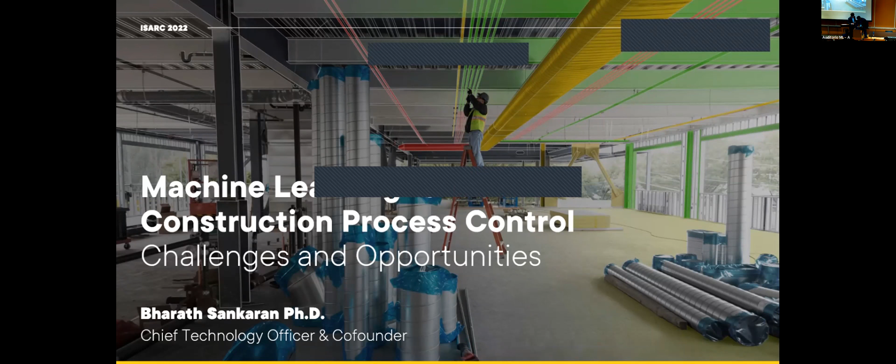All right, perfect. Hey, I'm Bharath, and I'll be talking to you about process control in construction and how you can use ML to address some of these issues. So I'll give you a brief overview of the problem: how do you implement process control, where machine learning and AI can have an effect, and what are the practical implications and the challenges that you face when you try to take this on site?

So construction is one of the world's largest industries, but also one of the world's most wasteful and inefficient. In fact, not only does it have a huge economic impact, it also has a humongous carbon footprint. But if you think of it, at the end of the day, construction is just on-site manufacturing. So how does it rank up with other forms of manufacturing?

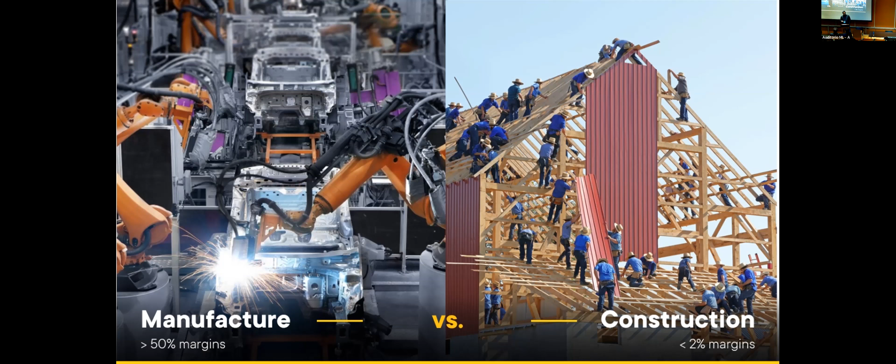Other manufacturing sectors, practically anything that is not construction, have incredibly high economic margins and are close to approaching zero waste. But construction is on the other end of the spectrum. And why is this? It's because they've implemented very efficient process control, and construction lacks process control. So the question is, how do you implement process control in construction?

For the control theorists out there, this is a control diagram, but basically process control is you have a reference state, you measure what's going on in the process, compare it to your reference state, and see how the two things have diverged. In construction, you have a wonderful reference state, which is your BIM. It's a 3D model that's evolving in time, so it's 4D.

You can compare this to the process on site by capturing the process on site through reality capture. Basically, the BIM is giving you geometry that's evolving. You capture geometry on site, you compare the two things, and you can figure out how they're diverging. And if the geometry is wrong, it's fairly safe to assume that the process is not going well.

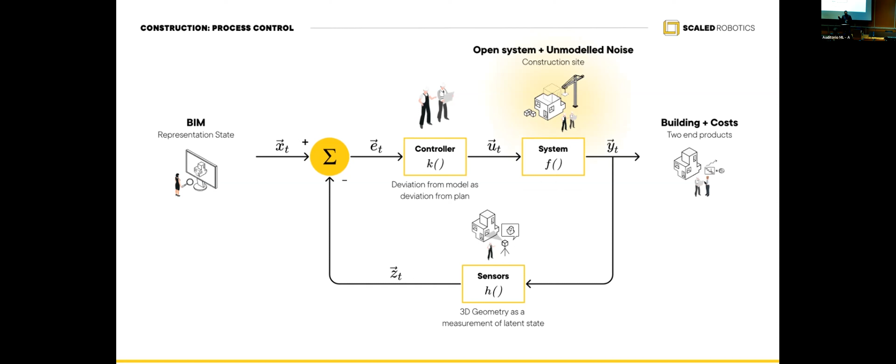But there is one practical issue in construction, if you think about it from a control standpoint: the system is open and there's a lot of unmodeled noise that enters the system. So what implications does this have? Why is it challenging? First things first, I said the BIM was your reference signal, but the BIM is a living document on an actual construction project. It's not designed once and left as is. It evolves during the course of the project, which makes it very hard. So you have an evolving reference signal.

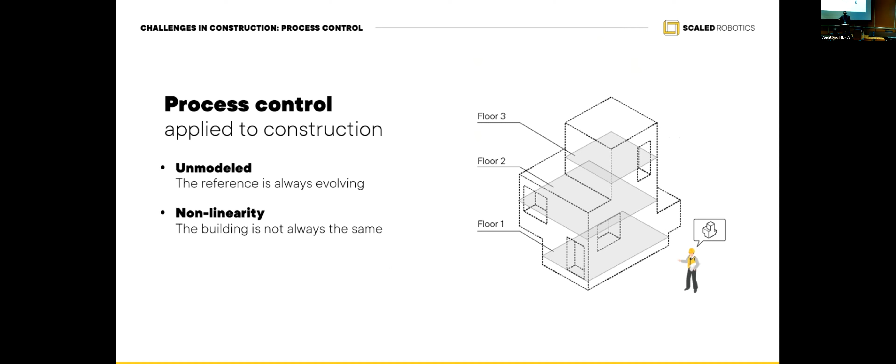Second thing is the process is extremely nonlinear. The only thing linear is gravitational causality. You can't build floor 3 before floor 2, but everything else in the process just runs whichever way it can. Then it has an extremely dynamic environment, which causes a lot of occlusions. So there's workers, materials, scaffolding, you name it. This causes what you call partial observability. You can't see the site entirely. You can't measure it entirely.

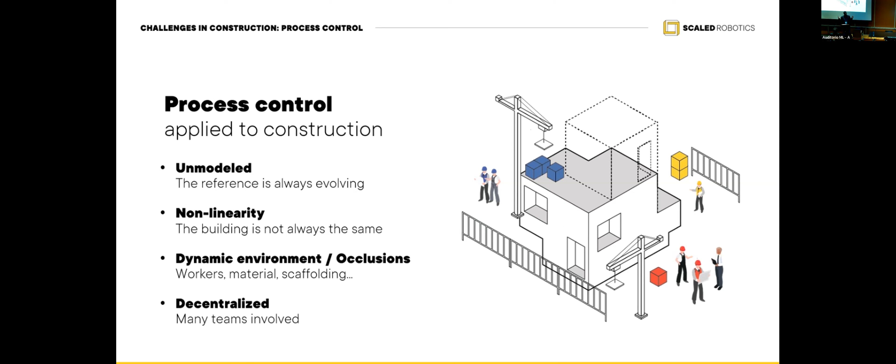And finally, it's a decentralized control problem. So we spoke about a BIM, but actually there are multiple BIMs. Every team has its own reference model and they just go ahead and do whatever they want to do. Outside of the practical implementation issues, you have environmental issues because a construction site is neither indoor nor outdoor. So you get the worst of both worlds.

It has both static and dynamic elements, and the dynamic elements have different frequencies of motion. So people walking on site move at a higher frequency versus scaffolding and temporary works, which have a lower frequency. And you have a lot of unmodeled things because a construction site at the end of the day is the storage facility too. So all of the material that comes into a construction site gets stored over there. So you have a lot of unmodeled noise.

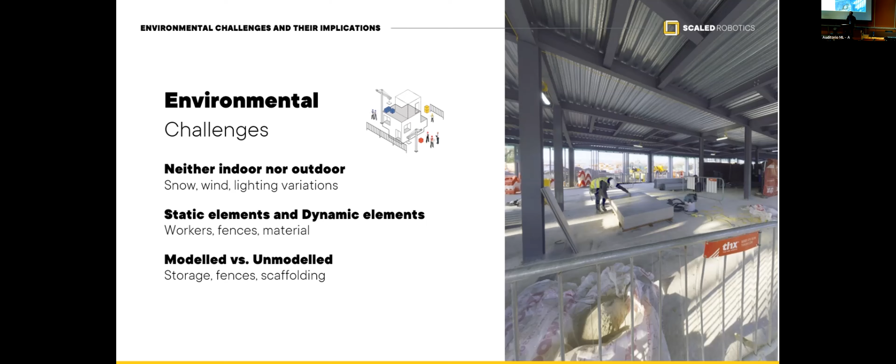And outside of the core problem, there are some practical implementation issues. I think Mani might have touched on this earlier, or I'm not sure if he did.

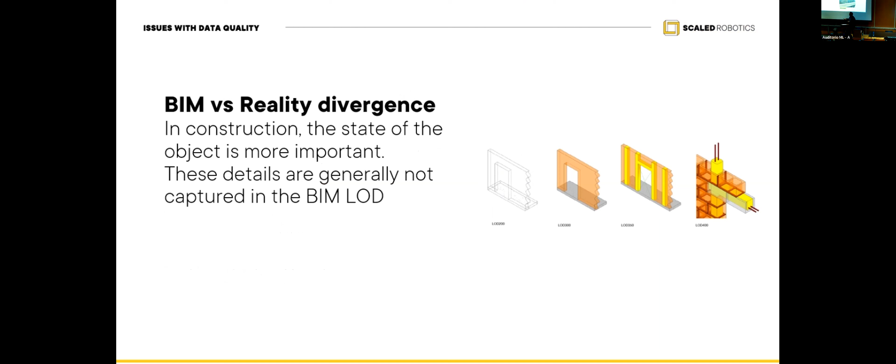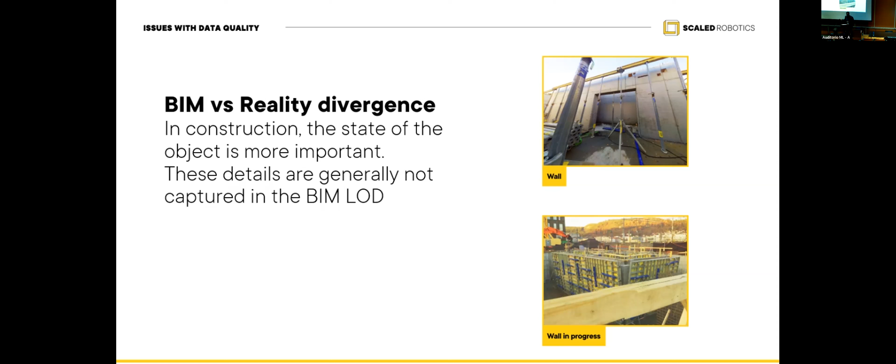The level of implementation of BIM and what actually happens on the construction site are two entirely different beasts. So either the BIM is over-designed for what actually happens on the site, or it's under-designed. A practical example is something like a wall. The wall in the BIM model on any practical construction site is probably designed like a block. What actually happens on the site is this incredible level of detail, which is never captured. So it's very hard to compare reality to design.

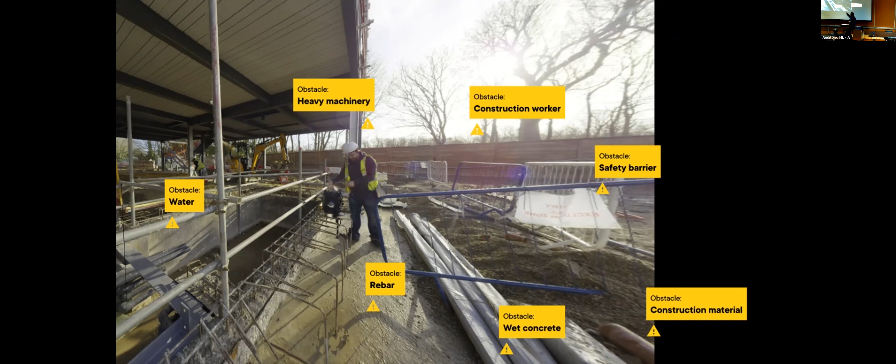Second thing is the environment presents a lot of domain-specific low-frequency noise. You have machinery, people, wet concrete, rebar. This is where the stuff needs to work. And here, it's not obvious to find out what is part of the building, what is not part of the building, what is being used to build the building, and what are the different dynamics for each one of these things. And finally, you suffer with the problem of into-the-wild sensor acquisition.

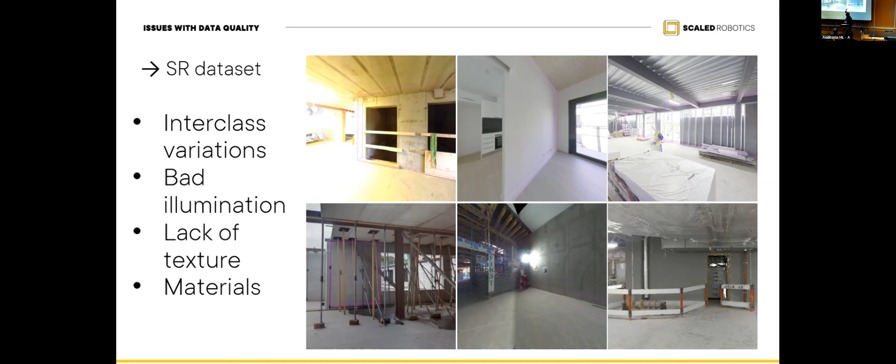So your construction site is plagued by every problem you can think of, and why visual techniques fail very badly when you try to do process control, because you have the lighting of the outside world and the inside world coming together at the same point. And it's a wonderful non-color picture because there's absolutely no texture. In a construction site, everything is gray. So you end up in a situation like this where you're really not sure what you're looking at if you pick up an image that was captured at a construction site.

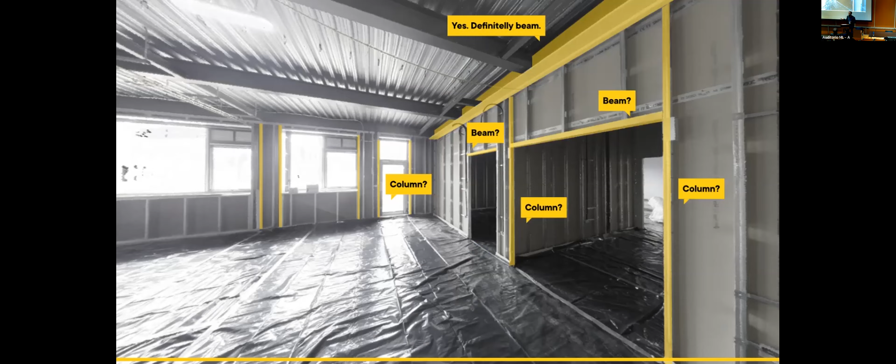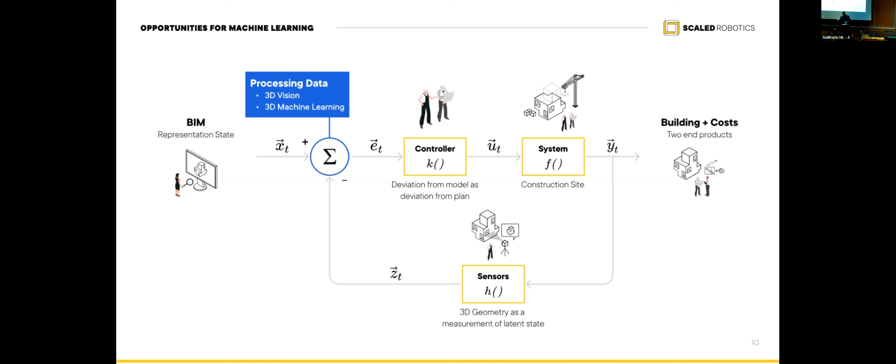So this actually presents opportunities to apply advanced methods in 3D vision and machine learning to be able to solve this problem. And what I'll be talking about from here on is some directions in how you think about solving these problems. The first direction is trying to think about equivariant models. If you think about it, let's say you have a 100 square meter floor slab. The problem on this floor slab could be localized to some corner, but it might be the same problem. There's excess material or there's a void somewhere. And it's the same problem that happens over and over again in different locations within that floor slab. So it's very hard to learn a model for each one of these problems.

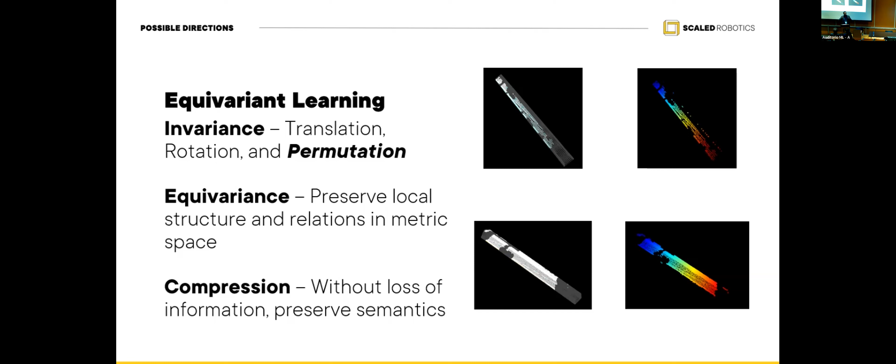Instead, what you need to think about is not only build machine learning models that are invariant, but they're equivariant. For people who don't have a pure math background, equivariant is basically you take a set, you reorder the set, and you basically have the same thing back. So that's basically equivariant. So when you think about building machine learning models to do construction process control or comparison within settings like this, you need to think about equivariance.

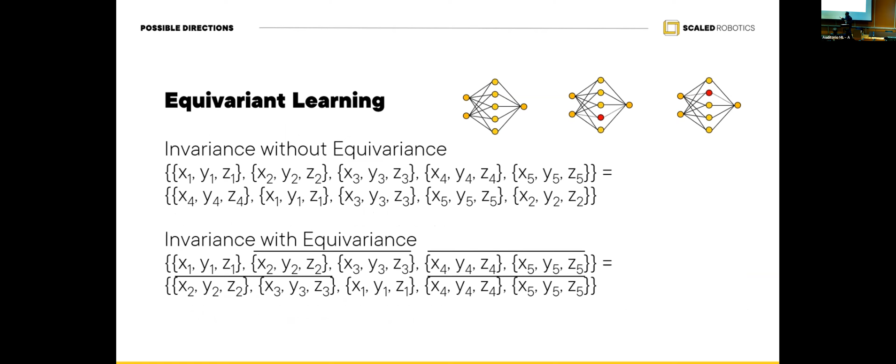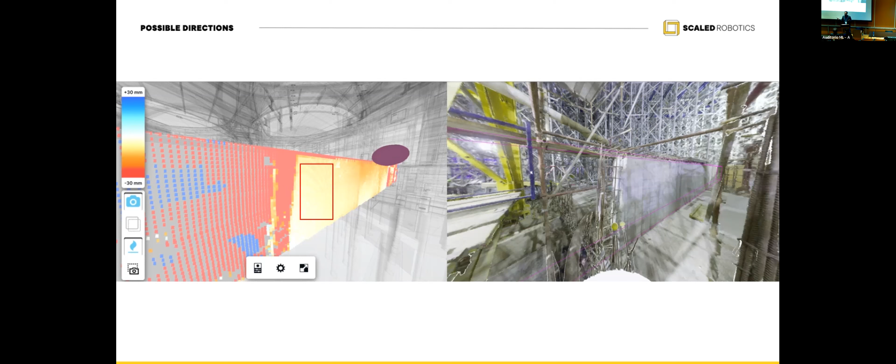The second thing is about localizing insights. So if you look over here, if you look at the point cloud associated with this or the image, the only reason you know that this wall is being constructed is because of the cement block right beside the rebar. But that location changes according to which wall you're looking at. So you need your machine learning models to be able to localize their insights, not tell you that something is X or Y, but tell you why it is X or Y. And that actually becomes useful.

And the final thing is unsupervised learning. Unsupervised learning is because semantics are very divergent on a construction site. You can get two experts, two project engineers, two architects, show them the same thing and ask them what is going on, and they'll give you two orthogonally different answers. And this has been our experience going on hundreds of construction sites around the world. So what we do is we do unsupervised learning on the data and then use domain-specific knowledge to actually filter out these insights to produce something that's actionable.

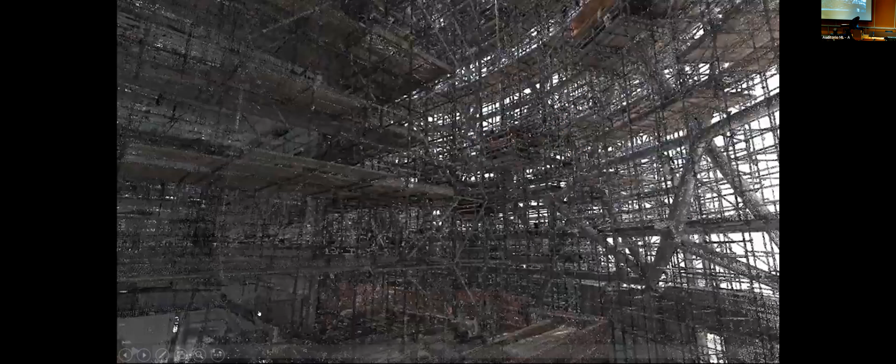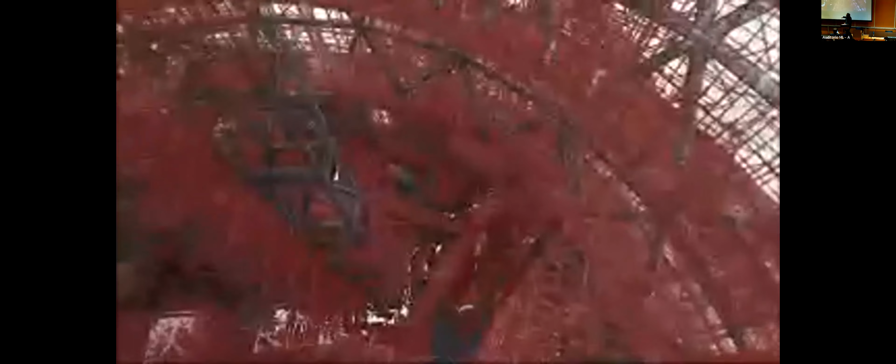So what does all of this look like in reality on a construction site when applied? These are the kinds of things that we work on a daily basis. This is our bread and butter. If you look at this site, it's very hard to say what is construction site, what is temporary works, and what is material, and where the site is actually evolving. But our algorithms that we've developed can go in and automatically filter out all the low and high frequency noise, which is everything that's just turned red. We extract that noise and try to capture the pure signal that comes out of this.

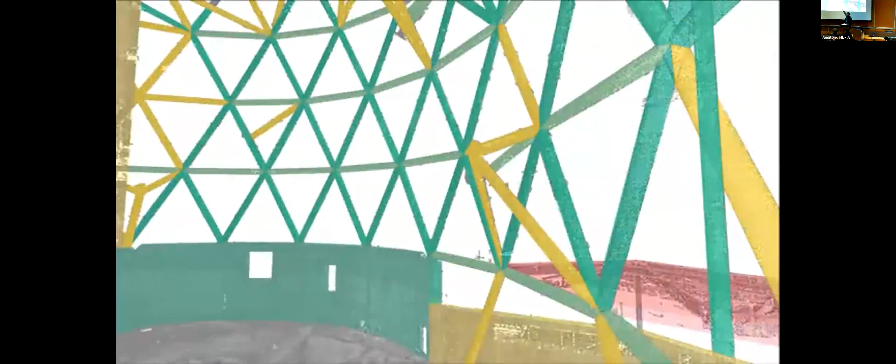And then we do machine learning on that using some of the insights that I told you about, the 3D machine learning techniques, and then deliver very high quality feedback to our stakeholders, telling them what is built, what is not built, what has been built incorrectly, and if it's built incorrectly, why it's been built incorrectly.